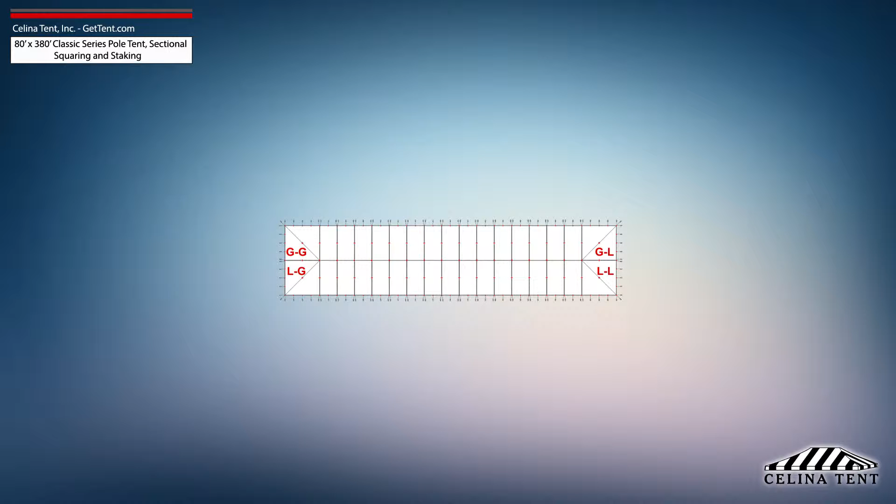This video covers squaring and 5-foot staking applicable to a sectional 80-foot by 380-foot Classic Series pole tent from Celina Tent. 5-foot staking is standard for tents with an eave height of 7 or 8 feet and would need to be adjusted for eave heights other than this standard.

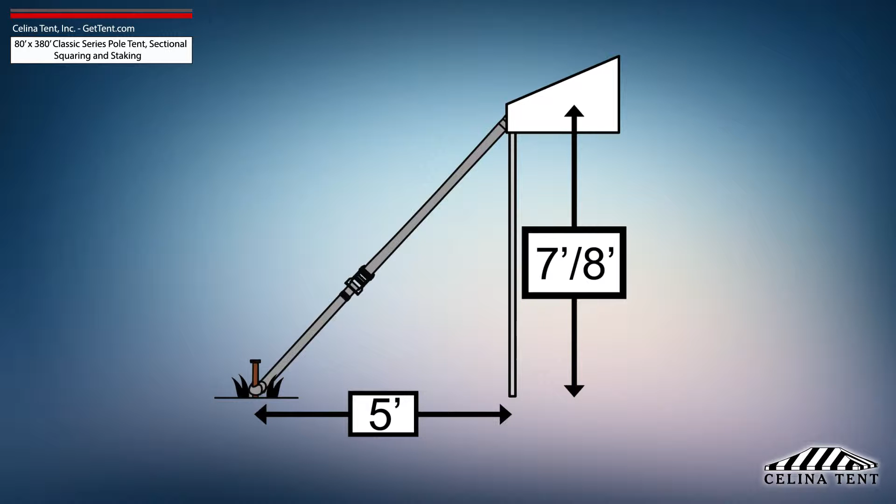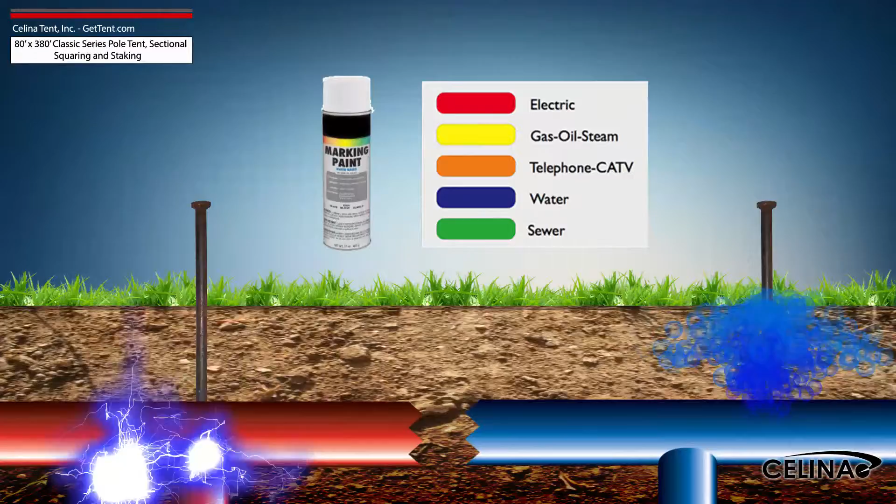Tent squaring allows the installer to accurately place all tent hardware and install tent stakes prior to beginning setup, and helps them avoid any marked underground utilities. Utilities must be marked by your state's local utility services prior to any tent installation.

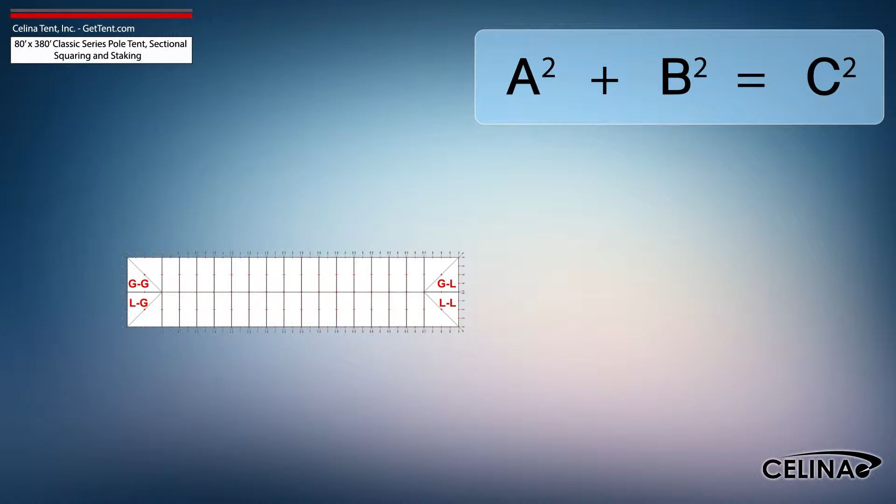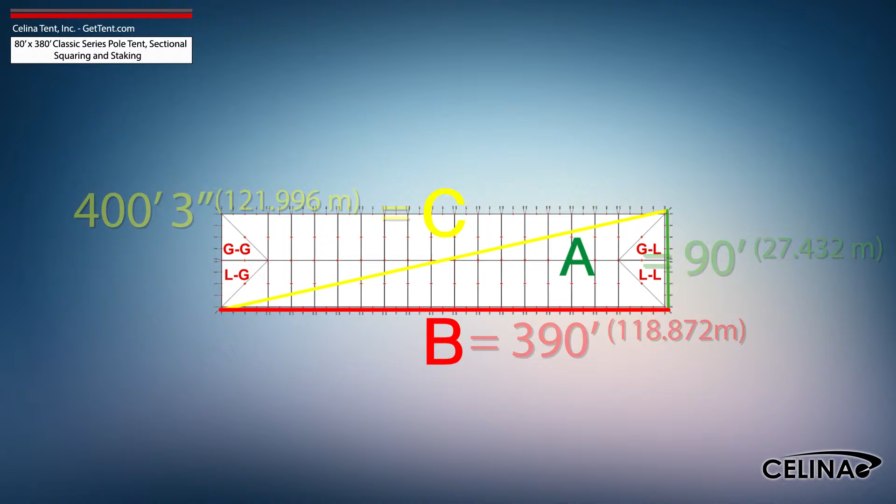Using the Pythagorean theorem and adjusting out for 5-foot staking, the entire tent footprint will be 90 foot by 390 foot, with a 400 foot 3-inch diagonal length. Celina recommends that an 80 foot by 380 foot Classic Series pole tent receives a minimum of 338 stakes.

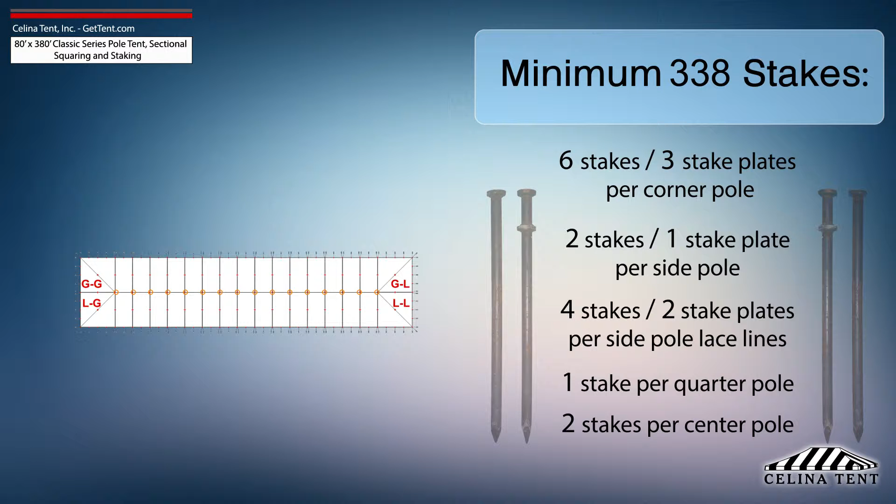6 stakes and 3 stake plates for each corner pole, 2 stakes and 1 stake plate for each side pole, 4 stakes and 2 stake plates for each side pole at lace line locations, 1 stake for each quarter pole, and 2 stakes for each center pole. This amount of stakes provides the minimum amount of security for a pole tent of this size. Additional staking is required for any site that doesn't meet optimal soil conditions.

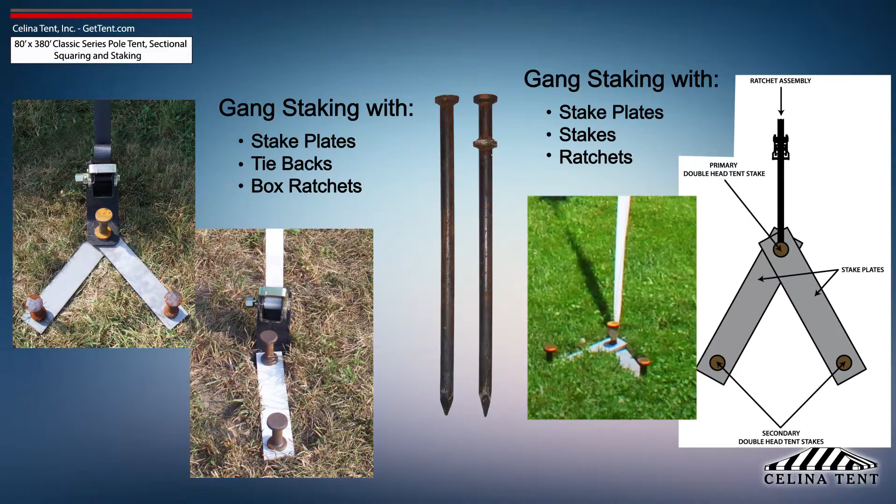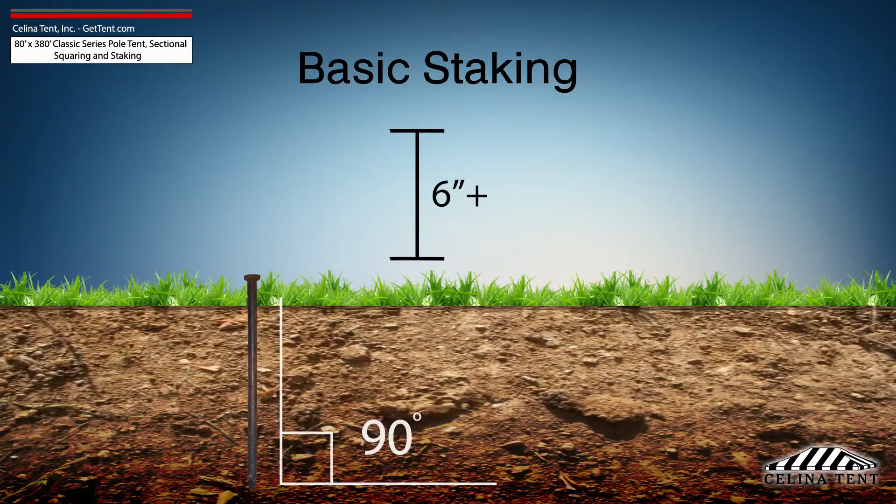Tent staking is the most important safety procedure during tent installation. Tent stakes should be driven vertically so that the stake is as close to the ground as possible with space to tie on a strap. Any length of stake protruding from the ground that is more than 6 inches will have detrimental effects on the holding power of the stake. Attach the ratchet strap or rope as close to the ground as possible to reduce strain on the stake.

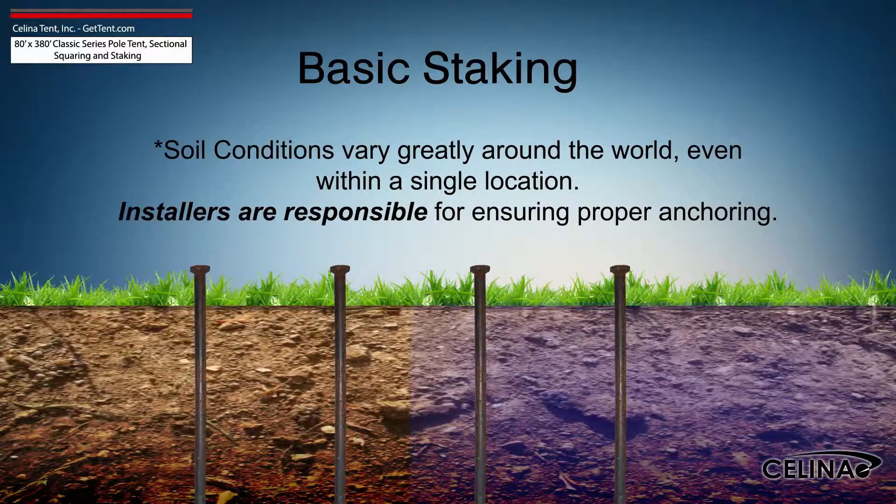It is the installer's duty to inspect the soil conditions and possible weather effects for the duration of the tent installation. For water-saturated or loose soil, more tent stakes are required to achieve adequate anchoring. Staking may be increased using dual stakes and a staking plate, or gang staking utilizing 2 staking plates and 3 stakes.